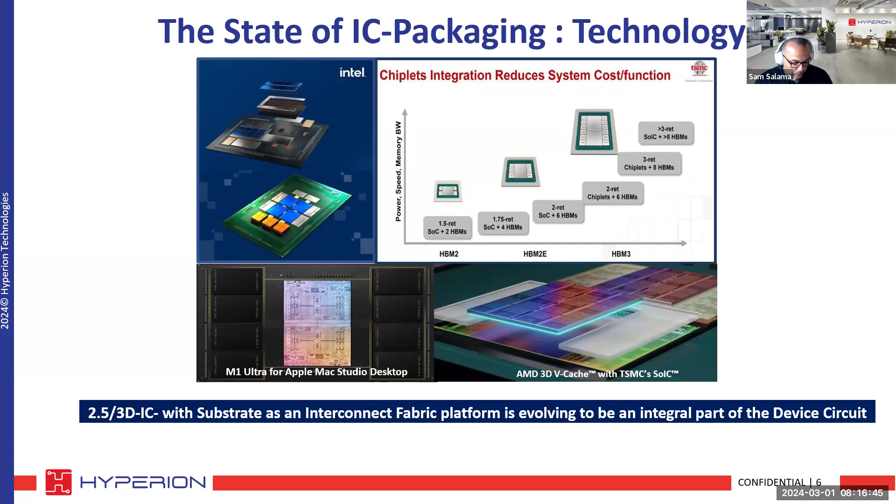So what does this mean for packaging? I tried to summarize that answer in the little insert on the right-hand side, but I think it's probably going to be useful for us to spend some time and talk about what this means. So because of what's happening with chipletization and heterogeneous integration, packaging is really shifting. It's moving from a performance enabler and performance preservation more toward performance enhancement. And there are different things that I think exemplify that redefined role for advanced packaging, and I tried to summarize that in this particular slide.

So packaging needs to shift now from focusing on single or multi-chip packaging to heterogeneous integration of chiplets, right? This means that the interconnect fabric that is being offered on a substrate or an interposer or an advanced packaging device is becoming an integral part of the circuit design. The second piece is miniaturization. And miniaturization means that you need to have fine features, like tighter bump pitch, tighter first level of interconnect at the chiplet level, finer trace and space, smaller vias, and the dimensions of these critical features on the substrates and the interposer are now approaching the same dimensions of the back end of the chip itself.

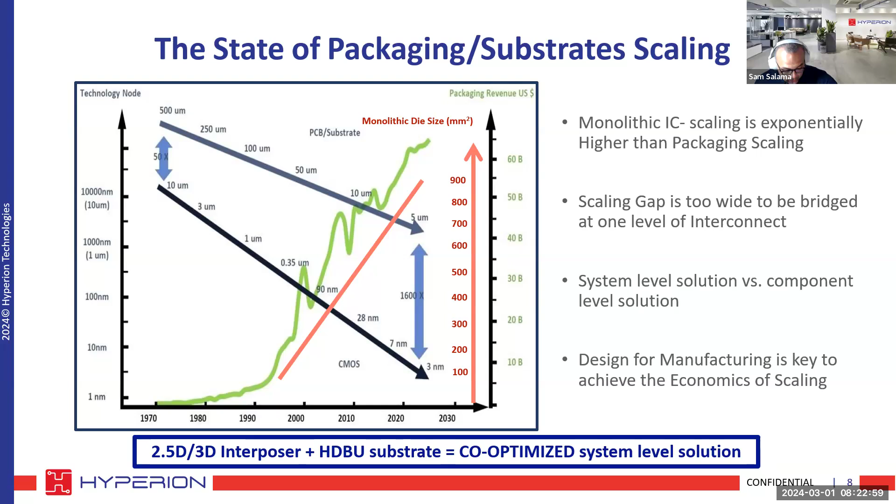If we take a look at the state of the supply chain for advanced packaging, I think it's well recognized in the industry that packaging is being concentrated in Asia, with the belief that it's being done mostly in Asia because of cost reasons. I think that particular notion is somewhat accurate when you talk about assembly and test. But when you talk about 3D integration through an advanced interposer, or you talk about high-density interconnect substrates, I think there are more serious reasons than just cost.

And if I take an example on the high-density interconnect substrate, for instance, there isn't any capability to do that today at the leading edge design rule or at any meaningful high volume manufacturing capacity. So the US contribution to that is zero. One could think that because the perception is packaging is done in Asia to reduce cost, this high density interconnect will come from a lower cost country.

Matter of fact, high density interconnect substrates are mostly coming from Japan, with some coming from Taiwan and South Korea. And if you really look at these particular countries, they are not necessarily cheaper to manufacture in than the US anymore, right? Specifically Japan. So I think there are other reasons why these high density interconnect substrates are there.

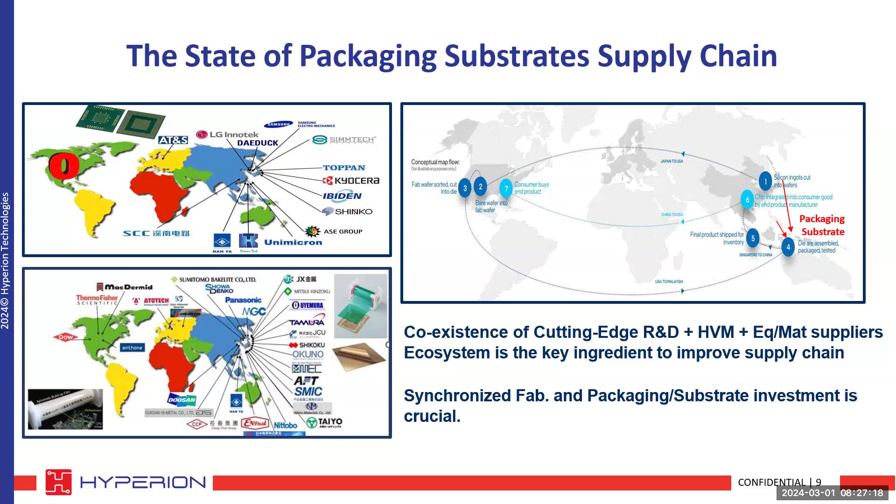So it's fair to say it was kind of indigenously developed in Japan. Yes, the organic high-density interconnect substrates as we see it today. That's a fair statement. Why does nobody talk about this fact? This is illuminating.

Yeah, and actually, I think the interesting part is in order for us to address that piece, I think we have to learn what is being done now and then take that as a fundamental platform over which we can improve. I don't think it's realistic for us to believe that we can circumvent the innovation and the ecosystem that was built in Japan over the last 30 years or so and do something very different that can obviate that quickly. I mean, it's something that needs to be addressed over time,

but it's something that is extremely important. However, I would have to tell you that manufacturing is one thing, but the ecosystem that feeds that manufacturing is another thing. I don't believe that it's realistic to expect that you will be able to duplicate that ecosystem very easily. I think collaboration with friendly countries like Japan is extremely important to continue, but there has to be mutual benefit, right? So there has to be value add that both sides continue to feel in order for this to be changed.

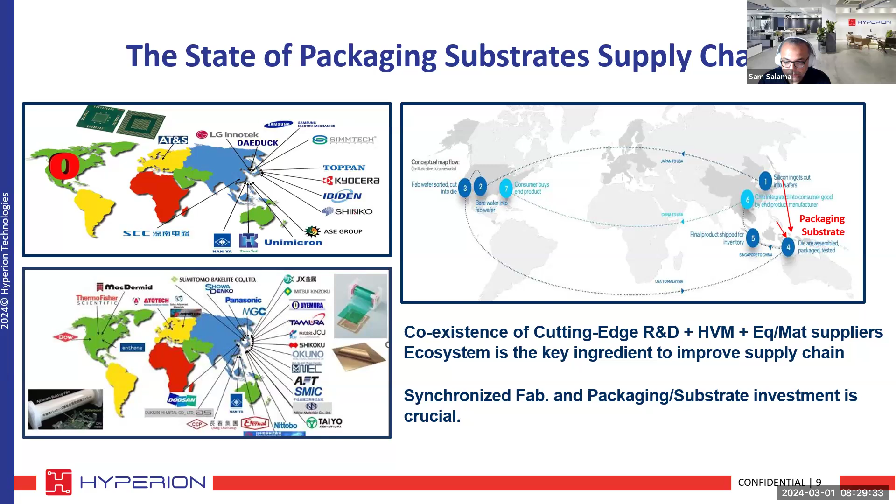So with all that we talked about, there are a few observations that I would like to share with the team as of what's going on in advanced packaging and how it relates to the overall system scaling and the integrated circuit scaling as well. So clearly advanced packaging's role is evolving, right? And with that, there is a noticeable market growth in advanced packaging as well. But market growth, as I will show in a subsequent slide, can be detected in two things. It can be detected by how many units the demand profile is carrying over the years, but also what this demand increase looks like.

Usually there is a cyclicality in the semiconductor industry, but if you look at the forecast for the majority of the leading advanced packaging solutions, you will not really notice that level of cyclicality as obviously as you would when you track equipment for front end or chip demand for front end. And there are some reasons for that that we'll touch upon.

The last thing I would like to highlight as an observation is over the years, advanced packaging tended to be looked at as an afterthought, right? So architects and very smart designers will closely track the integrated circuit scaling, and then they will design their features into the chips, taking advantage of that economy of scale that's offered by Moore's law, and then they will throw it over the fence, and the advanced packaging guys will be able to wire bond or test that and make it work. There has not really been a lot of co-optimization and a lot of coordination, at least in the roadmap, right?

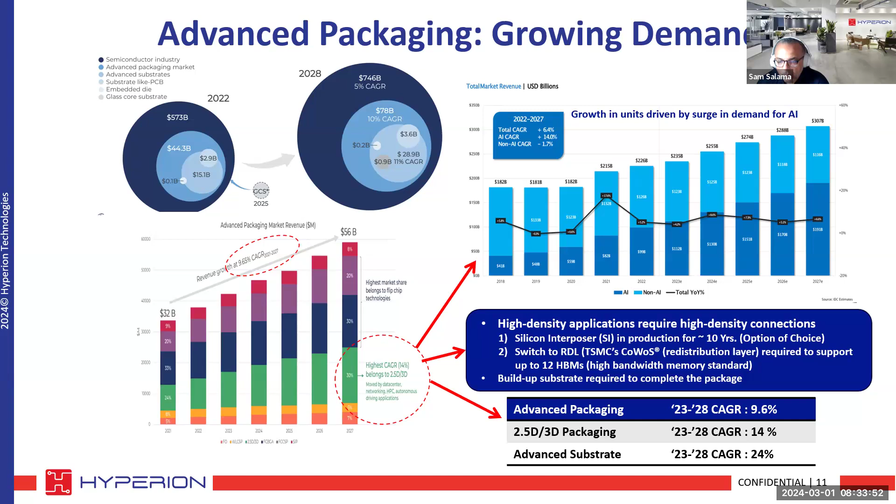So how is the industry addressing this packaging scaling requirement so that they can take advantage of the anticipated or persistent CAGR growth over the next 10 years or so? I think you all have done a good job in this particular area by summarizing what's being offered. And sometimes I get this feedback that from a designer and architecture perspective, when they look at what's going on on the advanced packaging side, they look at it as maybe a word soup. There are a lot of different terminologies that are being thrown at customers, a lot of different things that are named similarly, and a lot of similar things that are named differently as well.

From my perspective, a good way to simplify the view on what's going on in advanced packaging is to look at the interconnect density. I think this is a good moral equivalent to what tended to be happening on the integrated circuit at the transistor level, right? At the transistor level, people will refer to a specific node that represents the minimum feature at the gate width or something like that. The moral equivalent of that on the packaging side, in my opinion, is the interconnect density or the I/O density. And that reflects the bump pitch that you can offer from a packaging architecture perspective to support the increased density on the die.

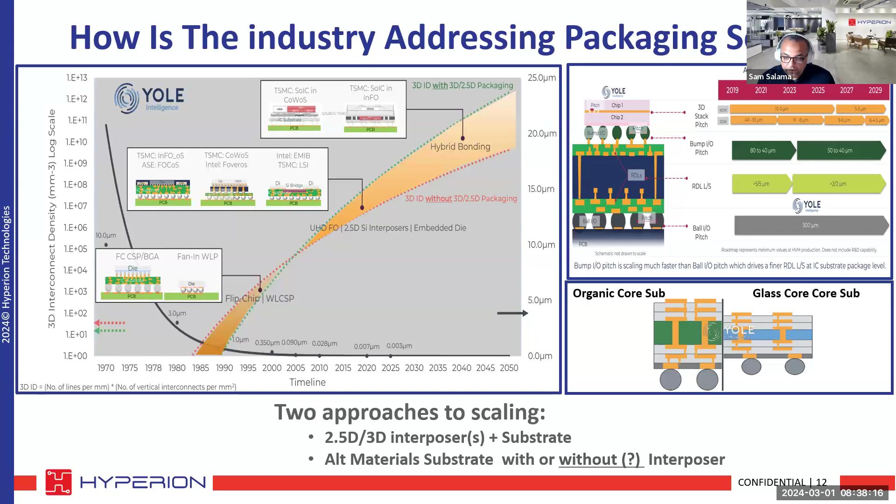And the leading option for that, what people are talking about today, is introducing a glass core substrate. So the idea there is if we can make a substrate out of glass, it will be very flat. And because it's very flat, then I can have very fine features. And if I have fine features, then I'm able to increase the density. And if I do that, then I don't necessarily need to have interposers and complicated 3D structures and all that.

There are a lot of industry-wide reports on the validity of that approach, with a lot of open areas for further validation. Like, people really need to explain how vertical interconnect scalability through glass will continue to deliver what is needed, or how the cost of that approach will fare against what's being offered today in the industry. One very important piece is thermal management and board level reliability. So that remains an open question.

And obviously the whole thinking of, will glass be a better fit as a thin interposer at the chiplet integration level, or will it continue to be introduced as a very thick material at the core level of the substrates? So hopefully that gives Sam an idea.

I have a question on your previous slide. So yes, this one? Yes. So I think last week there was a seminar at iNEMI by Intel on this topic. And the very last slide in that seminar was a call to action for the ecosystem to gather around glass, which basically tells me that a lot needs to happen for glass. So what is the reality, from designers' point of view, how far along do you think it is before we should worry about it?

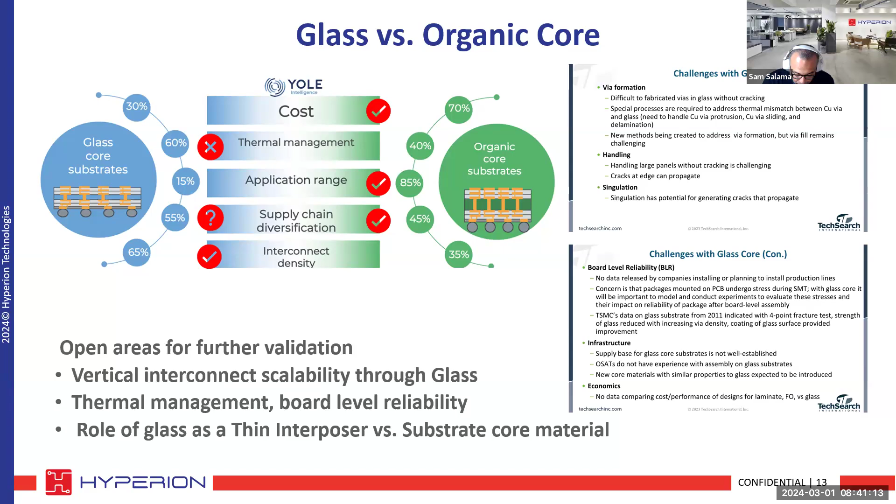So a decade is like an eternity, right? Yeah, in this industry, there are a lot of things that need to be addressed today with a higher level of urgency, right? Yep. Okay, thank you. Sure.

Okay, so hopefully so far I was able to give you a little bit of insight into what's going on in advanced packaging and share my perspective. I want to summarize this section of the talk by taking a reflective look at what's being offered today from the leaders in this field and what is missing, right? So if you look at the roadmaps, the different architectures, the design rules being published, and the directions highlighted for the future, there are certain things that are common. Most of these architectures use what people refer to as a common mode material. It's silicon and an organic RDL.

There is a singular focus on IO scale, right? So everybody's very focused on getting tighter dimensions so that the total number of IO per unit area is increasing, hoping that will address the system level scale. Power delivery and thermal management tend to be something that gets done after the packaging material is designed and after the design rules are defined.

Addressing scaling out, or the large form factor, and productivity and yield and design for manufacturing, is also a big challenge. Most of the advanced packaging options associated with 2.5D and 3D require a fab-like infrastructure, right? The exception to that is really EMIB, because EMIB is a passive piece of silicon that gets done in a very cost-effective fashion in a fab environment that is not as advanced a node, and then gets managed through substrate manufacturing from that point on. So from that perspective, it's the only exception. Everything else, like Foveros or CoWoS or InFO, requires a fab-like infrastructure.

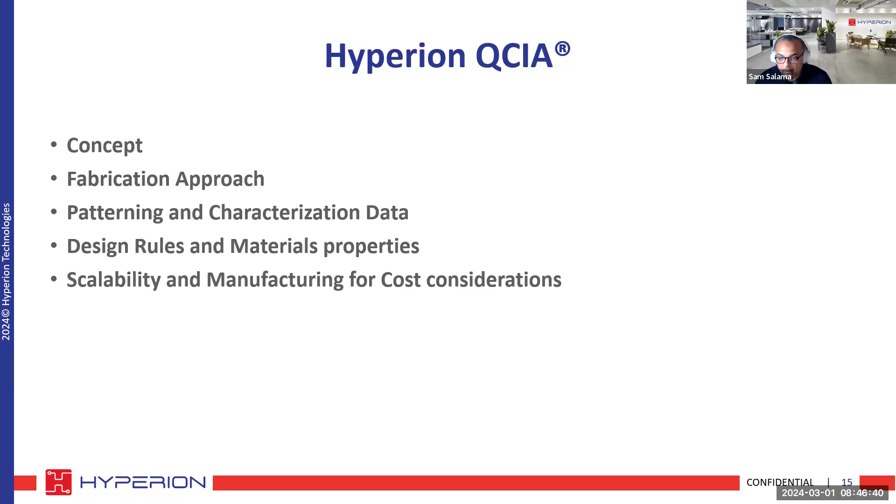So what we are doing here in Hyperion is actually focusing mostly on addressing these missing items that I summarized in the previous slide. So maybe quickly I can show you what are the concepts we are working on and what's our fabrication approach, what we collected so far, and what is our thinking to address this supply chain and scalability concern moving forward. So we believe, as I explained, that coming up with an approach that addresses thermal management, power delivery, and continues to deliver I/O scaling is very important.

We looked at this very carefully and we said, okay, if we are able to offer both material system innovation and manufacturing process innovation and combine those together so that we're able to address high frequency operation, power delivery, thermal management, and deliver fine features inside this packaging in a cost-effective fashion, then probably we are able to address the main concerns in this particular industry. So we came up with two things.

We came up with a process to pattern semiconductor-based interposers that we refer to as QCP, or quantum conversion patterning. It's a simplified interconnect fabrication technique. It's compatible with the back-end infrastructure, and it delivers the I/O scaling that everybody is asking for.

But on top of that, we use this on a specific material that is not silicon-based and that is not organic-based. It's an inorganic wide bandgap material that is not necessarily semiconductor grade, because we don't need to have that when we are talking about the packaging interposer. We are not creating integrated circuit transistors inside. We are creating through holes and wires and fan out layers and stuff like that.

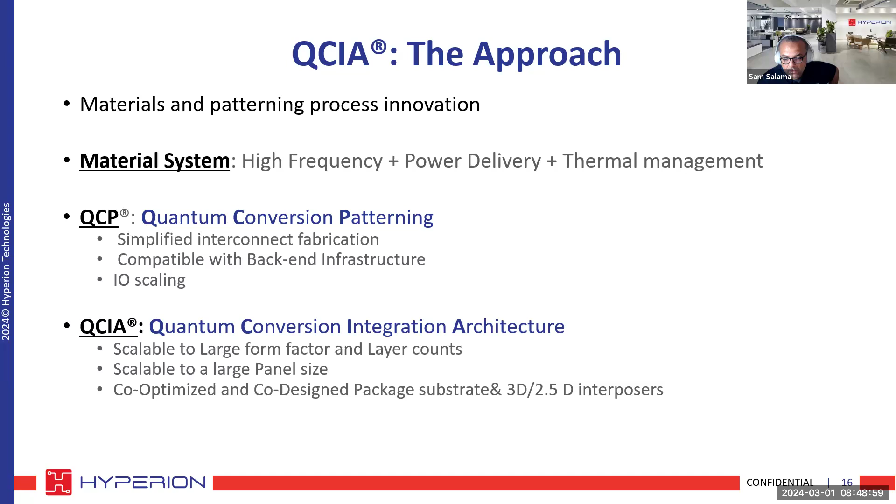And we used that process and that material system to construct the QCIA. This is our trademark architecture for 2.5D and 3D interposers, similar to the SOIC or the Foveros that are being offered in the market today, but built with our process and on this very specific material. So the concept is actually very simple, right?

So if you look at what the industry is offering today with the Damascene process through an interposer, you get a piece of silicon that's typically 100 micron thin, and you create some very fine wiring, and you try to connect this wiring from the front end where the chips will be interfaced with to the back side of the interposer.

The way you do that is either through a through silicon via or a bunch of stacked via, a bunch of staggered via, but the directionality of all these connections are only vertical, right? We looked at what if we are able to create these interconnects in an omnidirectional fashion so that you are able to do that vertically, horizontally, at any angle, given the specific volume that we're dealing with. That will have a tremendous impact on increasing the interconnect density that you can offer in a given unit volume.

So that's one. Sam? Yes? Just a quick question, just so I get my bearings straight here. What you're trying to do is offer a replacement for some kind of interposer, whether it's silicon, RDL interposer, or just RDL interconnect, or one of those million fan-out technologies that exist. That piece you're looking to do differently with your patent ideas. But the package substrate, that still exists, right? Where the interposer is typically mounted on the substrate, and that piece still stays the same.

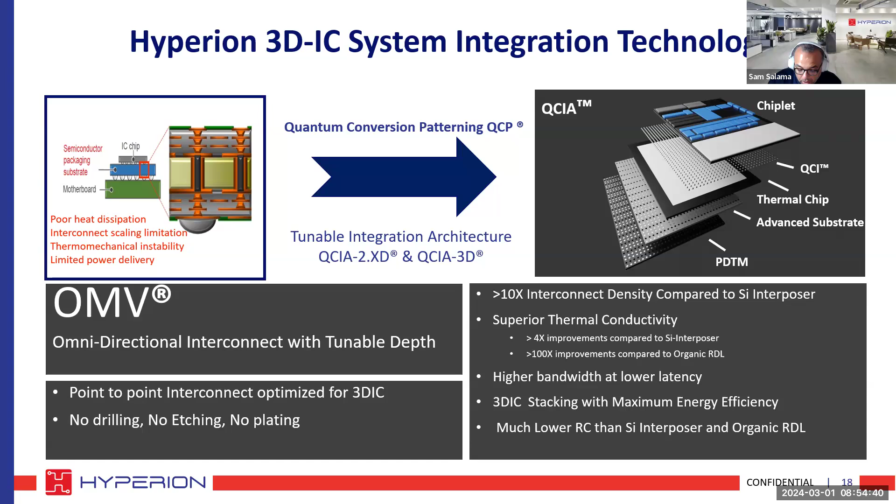We believe it's unrealistic to assume that you can just bridge it with an interposer alone or a substrate alone. So we designed our first test vehicles and we collected some data. We designed our second test vehicles, and this particular design for the second test vehicles really intended to house design rules as tight as what you would need to route something like HBM3, for example. So we collected data on how we are going to pattern that particular design requirement using our technology, and went down into the dimension of 1 micron, and from a vertical interconnect perspective, we went all the way from 50 down to 5

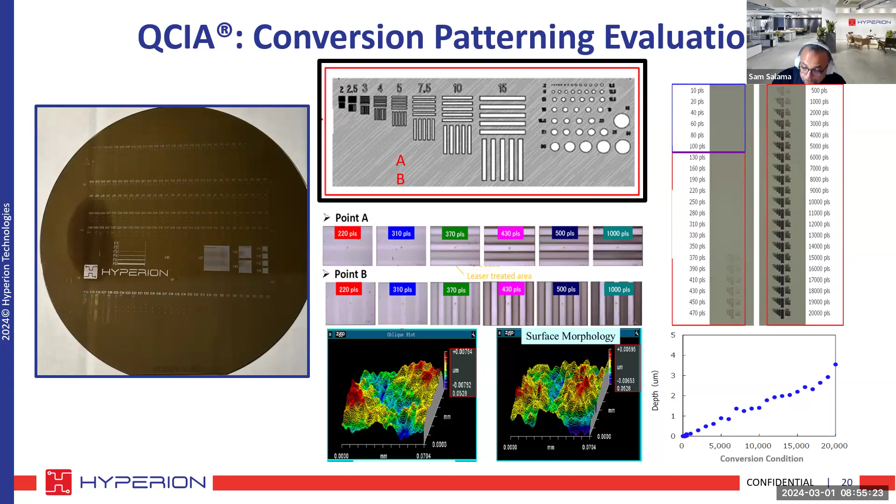micron. I think middle of last year, we also published our organic substrate design rule kit in conjunction with the QCIA interposer. So we're targeting to have a 100 micron thin interposer with 1 all the way up to 5 line and space. For this omnidirectional via interconnect, our starting point is 10 micron with 20 micron pitch center to center. And the metallization depth, or the thickness of this conductive phase that we are creating, we are taking it all the way from 5 micron to 1.

So we believe that this combination of design rules, in addition to the advanced organic substrates that we design and use, will offer attractive solutions for people that are designing into AI and high performance computing.